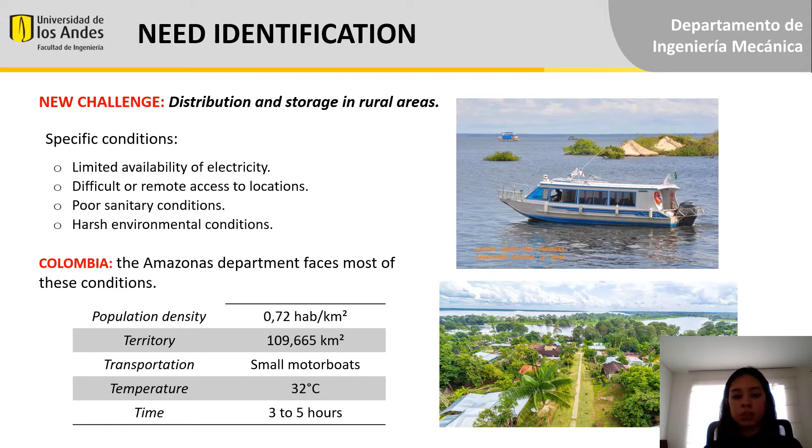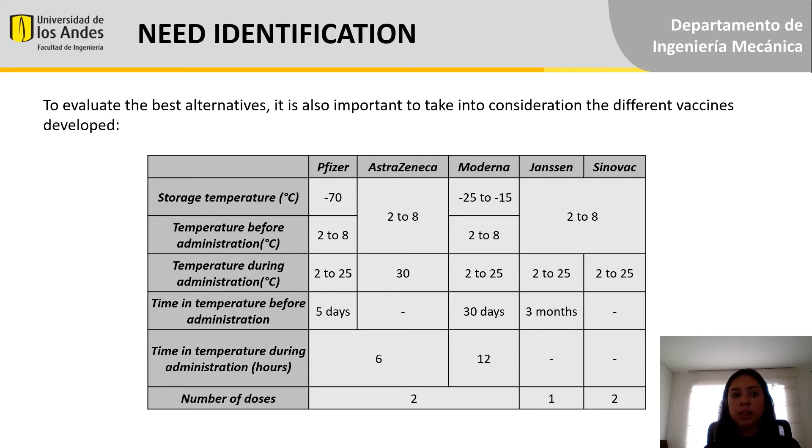To begin with, we identified a new challenge, which is the distribution and storage of the COVID-19 vaccines in rural areas. These places undergo specific conditions that make it a lot harder for this to take place. In the case of Colombia, the Amazonas Department faces most of these conditions. To evaluate the best alternatives, we also took into consideration the different vaccines that were developed in the past year, Pfizer being the most demanding one in terms of storage temperature.

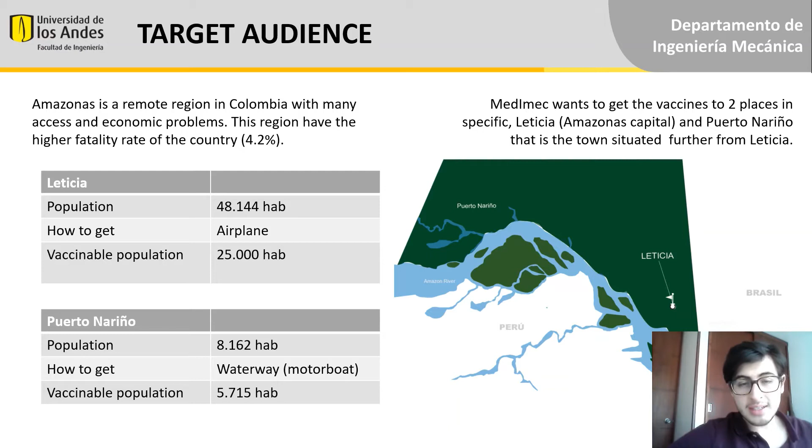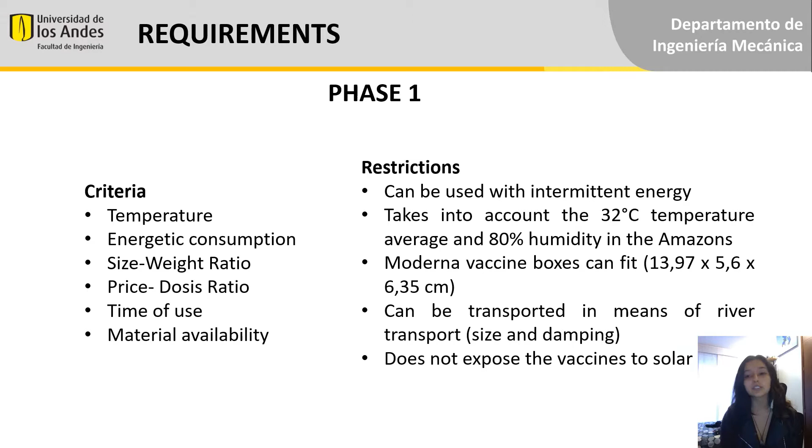About the target, we selected this place because we want to help this region that is very affected by COVID-19 due to the closeness with Brazil, in addition to the limited economic and electrical resources and the situation in which they live. We determined the requirements in two phases. In the first one, we divided it into criteria and restrictions based on the target audience and the needs identified.

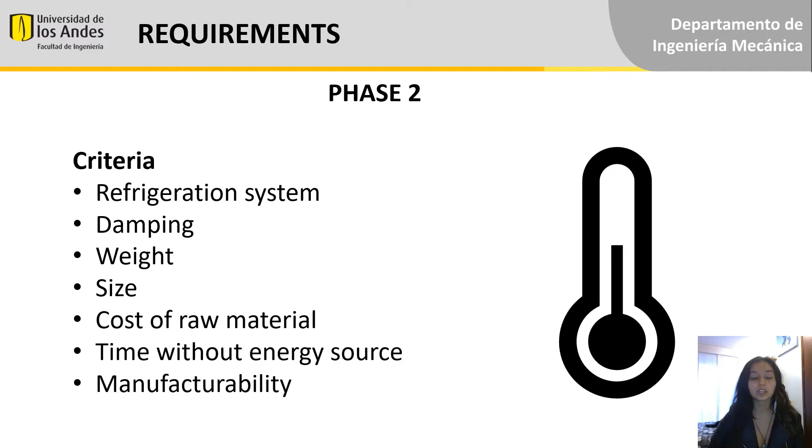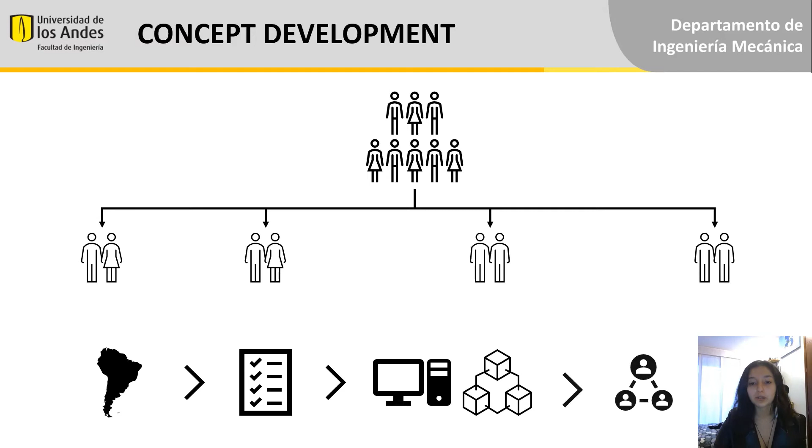In the second phase, we compiled both the criteria and the restrictions in order to make 7 criteria: the refrigeration system, the damping, the weight, the size, the cost of raw material, the time without energy source, and manufacturability. We will get into detail later. For concept development, we divided into 4 subgroups, which would take the information that we already had with the criteria, make prototypes, develop models, and then share them with the group in order to compare different kinds of systems.

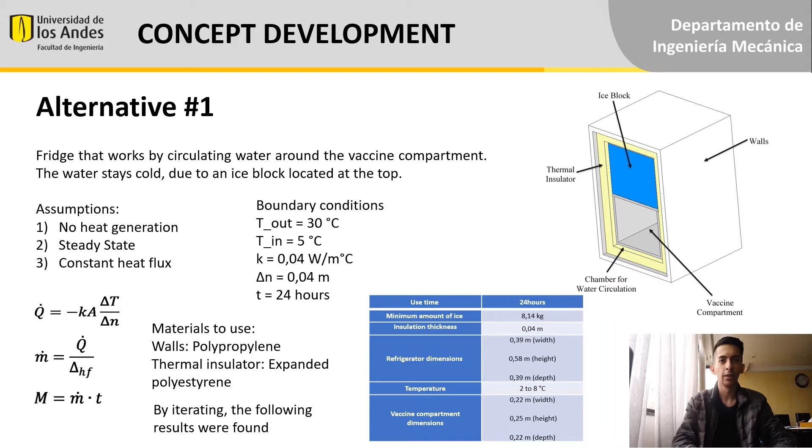The first alternative is to design a small refrigerator based on the system developed by Churchill, which takes advantage of the fact that water varies its density with temperature, reaching a maximum at 4 degrees Celsius. So the water will flow around the vaccine compartment, keeping it at this temperature. The first estimates suggest that to achieve a 24-hour autonomy, there must be a minimum of 8.14 kilograms of ice and a 4 cm thick thermal insulator.

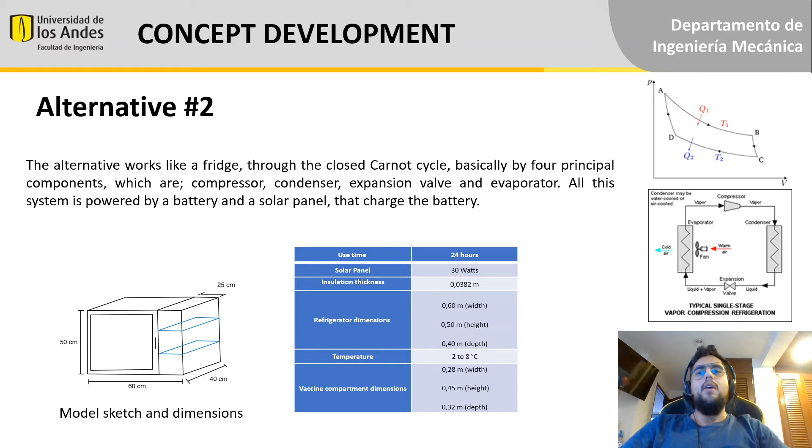The purpose of this alternative is that it works as a fridge due to the fact that the principle used is the closed Carnot cycle, as you can see in the images on the right. It works through 4 essential components: compressor, condenser, expansion valve, and evaporator. This entire system is powered by a 30-watt solar panel, which charges the battery and allows it to work without the need for an external source. The dimension of the fridge allows having the system on the right side and the vaccine compartment on the left side, which is designed to fit around 9,000 doses.

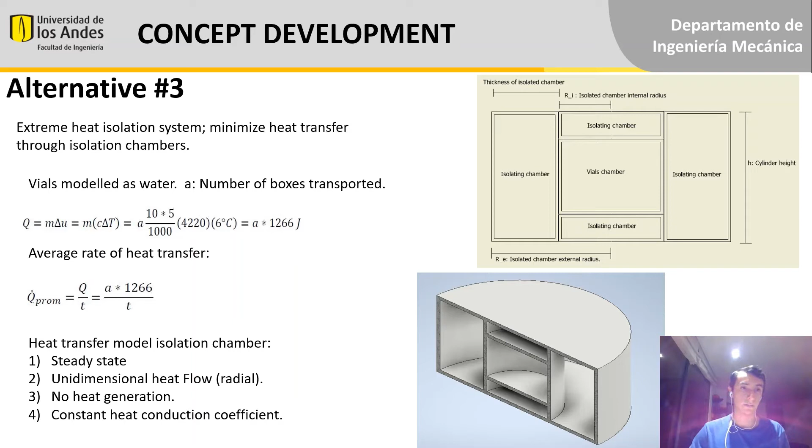In alternative number 3, we designed a heat isolating system composed of 4 isolating chambers and a vials chamber at the center. Our prototype has a cylindrical shape. We based our calculations assuming vials contained water, and we calculated our average rate of heat transfer, where A is the number of boxes and T is the time required. Finally, we made a heat transfer model under some considerations. With these parameters, we were able to create an analysis of the thermal conductivity in relation to the thickness of the isolating chambers. Some additional considerations were that the best isolating material would be a polymer, and the insulating chamber would be filled with air.

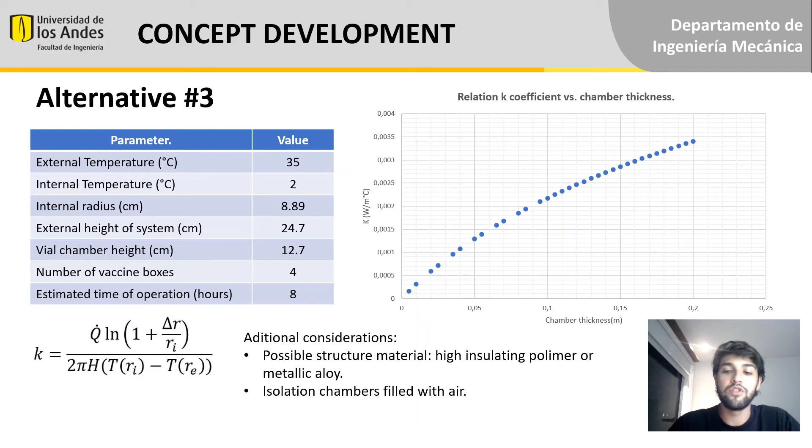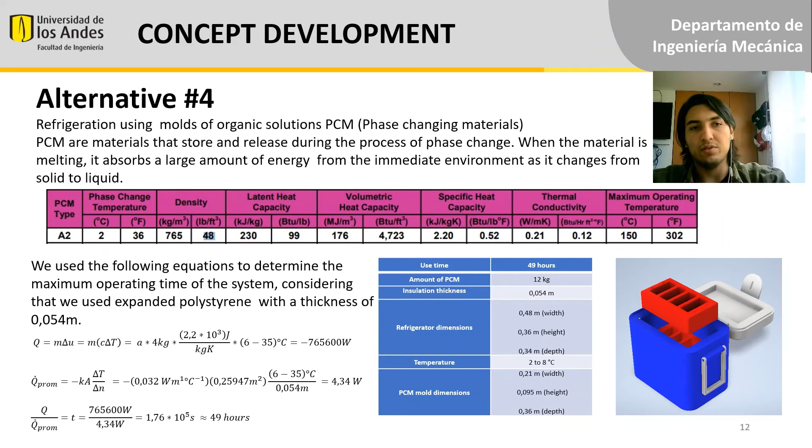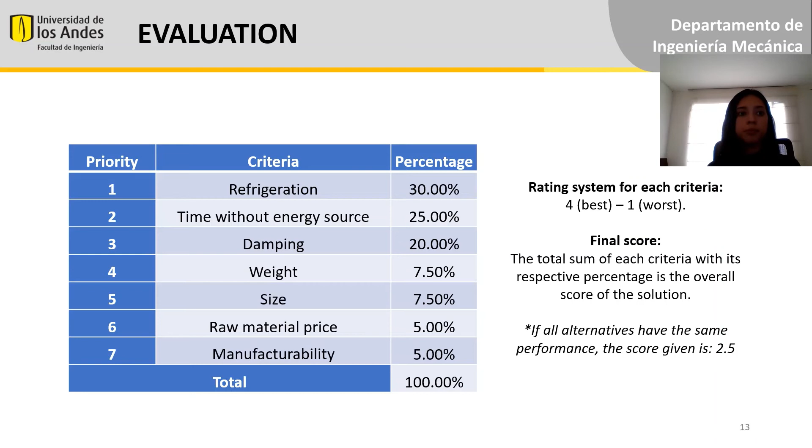For the evaluation, we had 7 different criteria with their percentages. We used a rating system for each criterion from 4 to 1, 4 being the best, 1 being the worst, and the final score of each prototype was calculated as the sum of each criterion with their respective percentages. If all alternatives have the same performance, we gave them a score of 2.5 for a given criterion. We evaluated each of the alternatives with the criteria mentioned beforehand, and the summary is on the table that you can see on the screen. The final results were, for the first alternative, 2.90, for the second, 2.55, for the third, 2.30, and for the fourth, 3.25.

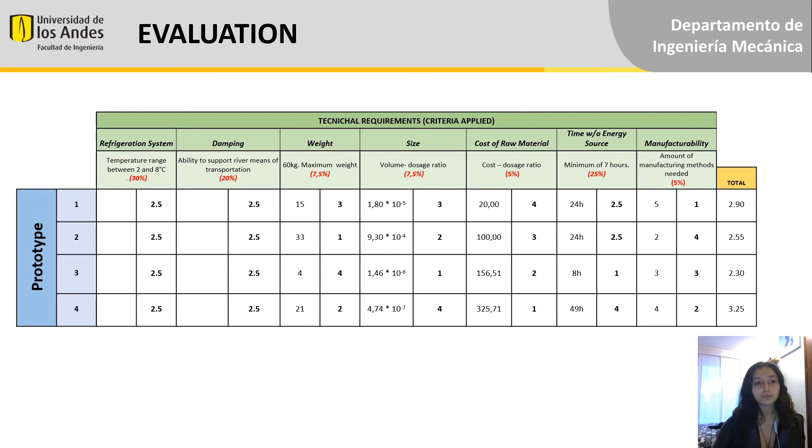For the final concept, we decided on the combination and integration of the third and fourth alternatives, resulting in a system based on insulation chambers and PCM refrigeration. We concluded that the PCM would be a great complement to the insulation chambers and would allow the temperature to be maintained in the range that we want for a much longer time than we thought. Also, we concluded that the geometry that we could make with this mix would be highly accurate and highly comfortable for transportation, and it would also be a cost-effective alternative. The two subsystems we would be working on would be the insulation and the refrigeration.

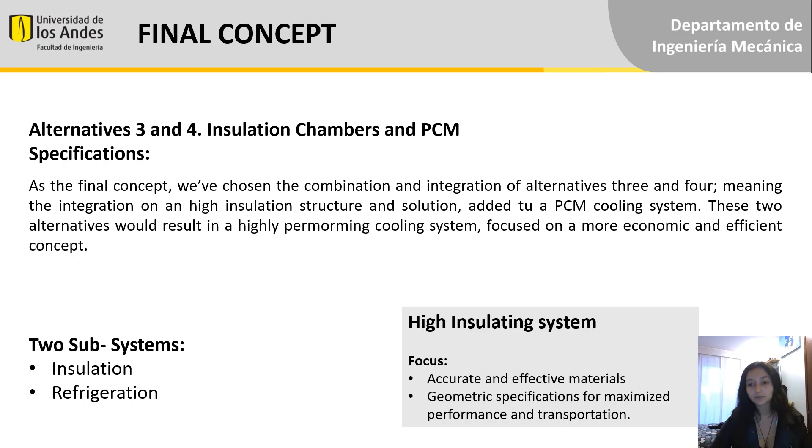In this first sprint, MediMec was able to find viable and diverse solutions, and we managed to build a healthy team dynamic. With the decision that we made, we need to take some things into account for the future work. The first one being the geometry of the new system, the way in which the PCM will be manipulated. We need to develop high-resolution prototypes specifically for damping, system temperature variations when the system is opened, heat transfer models with convection and radiation, manufacturability internationally and nationally available to us, and we need to find a more precise budget.